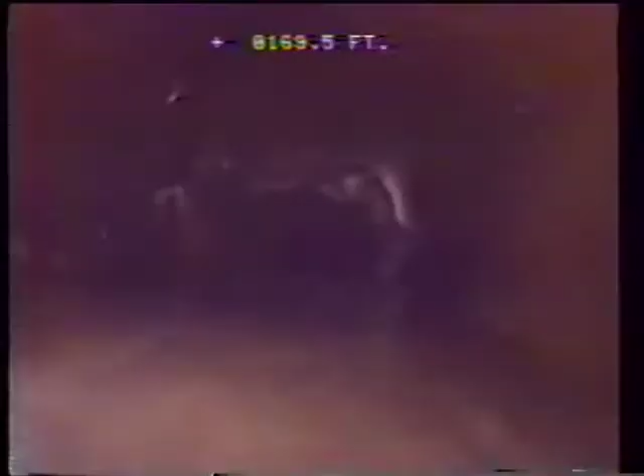Television has been growing in popularity as a means of investigating the condition of all types of buried sewer lines. As an investigative tool, it is unmatched. The advent of television inspection has enabled operators to pinpoint structural damage, corrosion, leaking joints, root penetration, illegal connections, and other problems often seen in older lines.

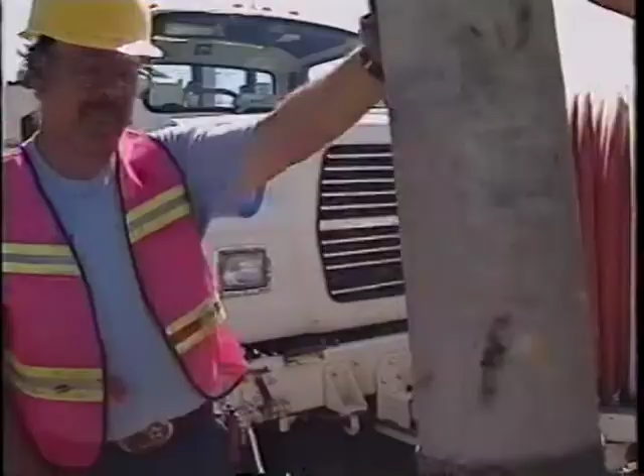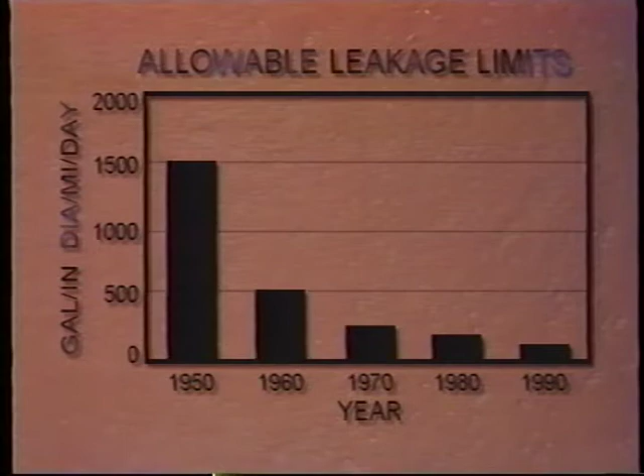Maintenance and rehabilitation of older systems has been made possible through the use of televised inspection. And as the older lines are brought up to today's standards, much of the credit is due to underground television surveys and to the fine work of the crews that do the evaluation.

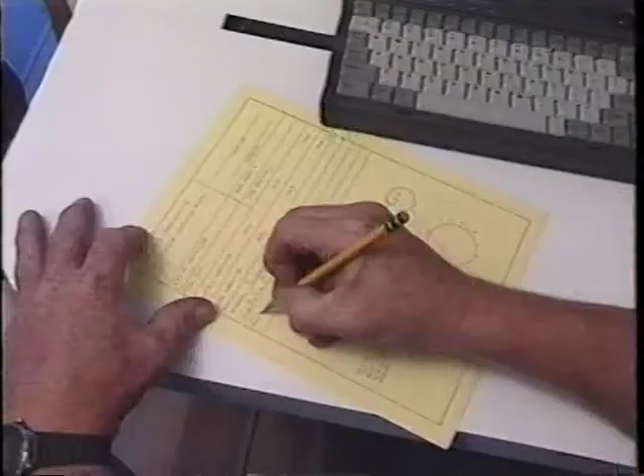More recently, however, a number of agencies are using television as a means of determining the acceptability of newly constructed lines. Opinions regarding structural damage are, in many instances, made erroneously. Operators of television equipment are looking for problems. This is the nature of their job.

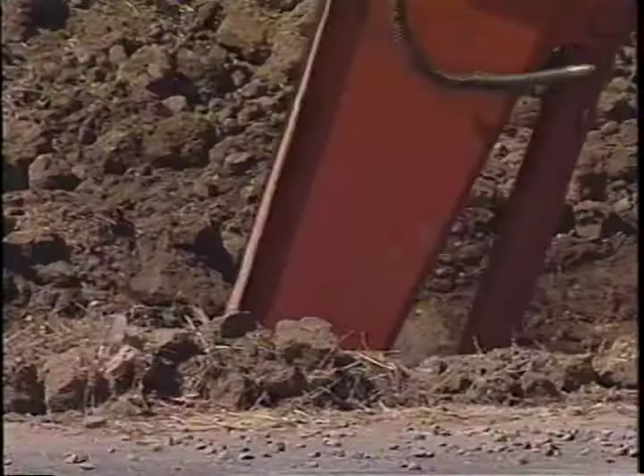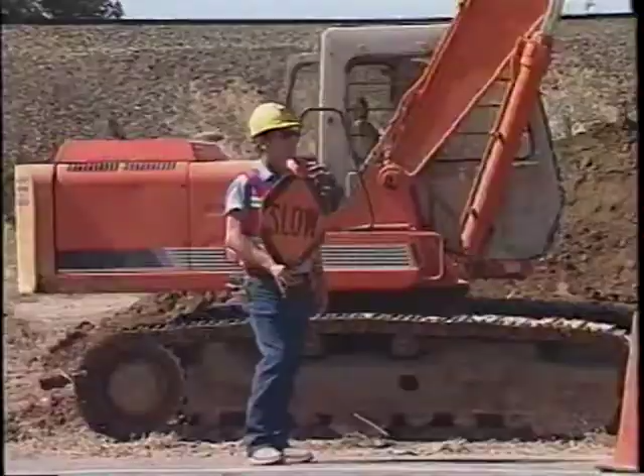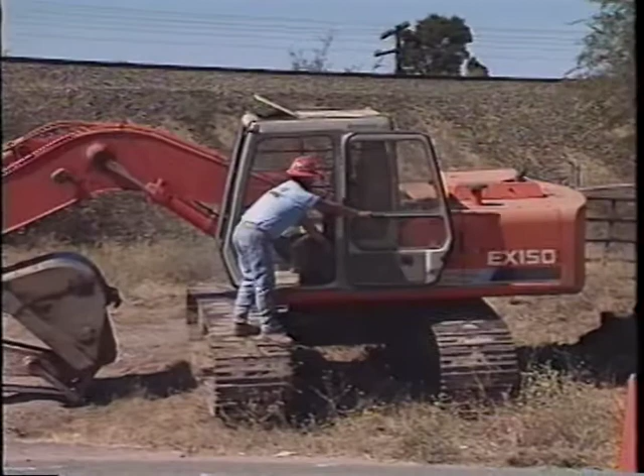However, there have been many instances where dig-ups have shown the problem described in the log to be either non-existent or of a significantly less magnitude than originally indicated. Unfortunately, when entered into the operator's log, these unintentional errors of judgment have frequently led to conclusions which become difficult to resolve. This practice has resulted in delay, extra cost, confusion, and in some cases, legal action.

To prevent unnecessary expense, delay, and possible litigation, the National Clay Pipe Institute and the National Association of Sewer Service Companies agreed to co-sponsor a project to explore these problems in greater detail. Recognizing the educational benefit that would come from the study, the CUES Corporation also agreed to participate. The evaluation would be done at the clay pipe manufacturing facility of Gladding McBean, located in Lincoln, California.

The goal of the project is to demonstrate and identify several factory and field conditions which can be erroneously interpreted during televised video inspection and assessment of new sewer lines. It is by no means all-inclusive, as many other conditions may be found in a sewer. The following three areas will be covered. 1. Sags in line. 2. Seeing is believing. Or is it? 3. Perceived defects.

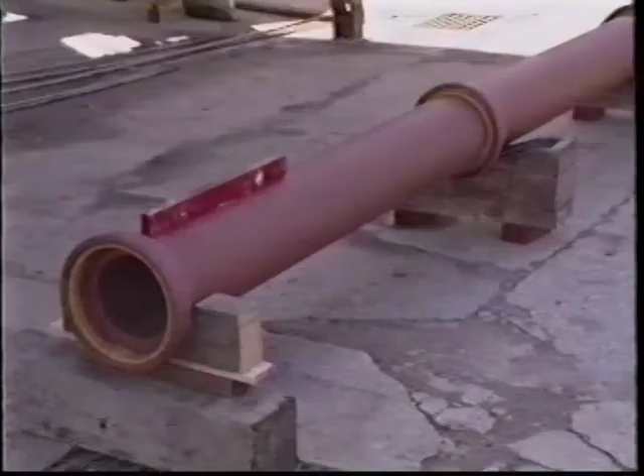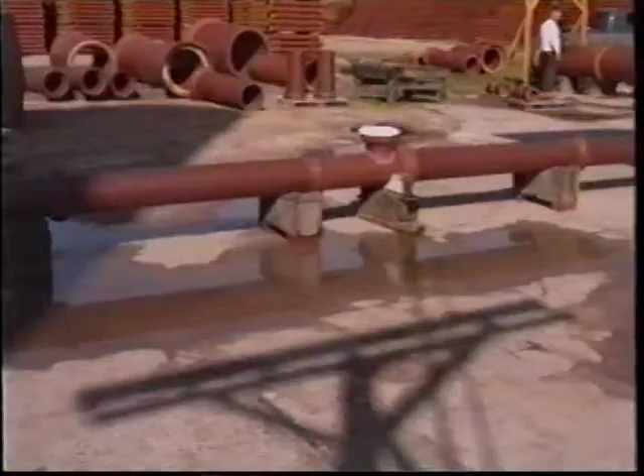Sags in line. The first test shows a simulated sag in an 8-inch clay pipeline. Although the amount of sag permitted in a pipeline is not specified in ASTM, it is common knowledge that all pipelines experience some settlement under load, and it is due to the pipe bedding rather than the pipe itself.

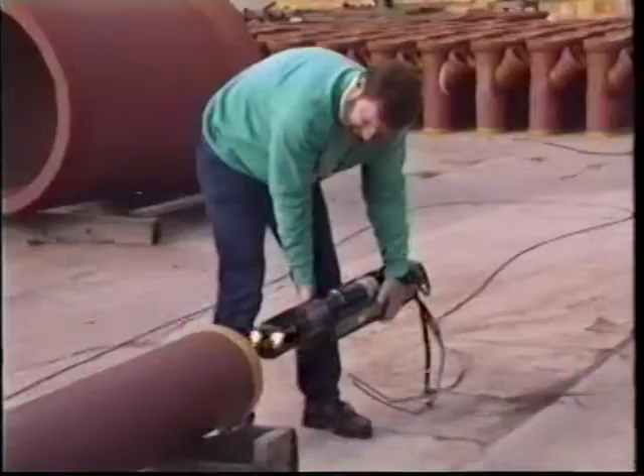It should also be noted that a televised inspection made shortly after a water exfiltration test can have the appearance of a sag due to the standing water, which may take a long time to drain from the line. This is especially true in a line with a very flat grade. Such lines have been erroneously declared to be sagging by an inexperienced operator.

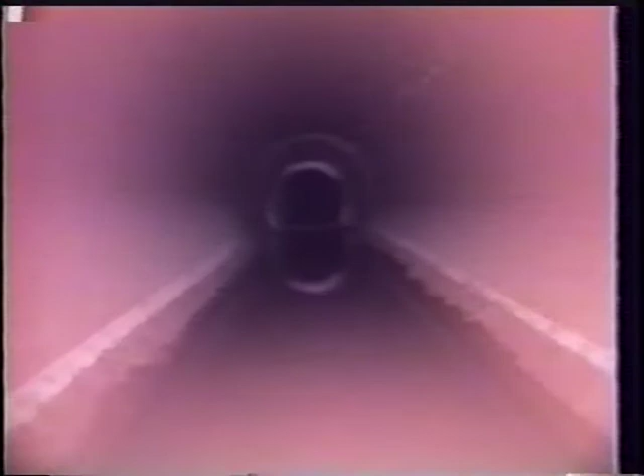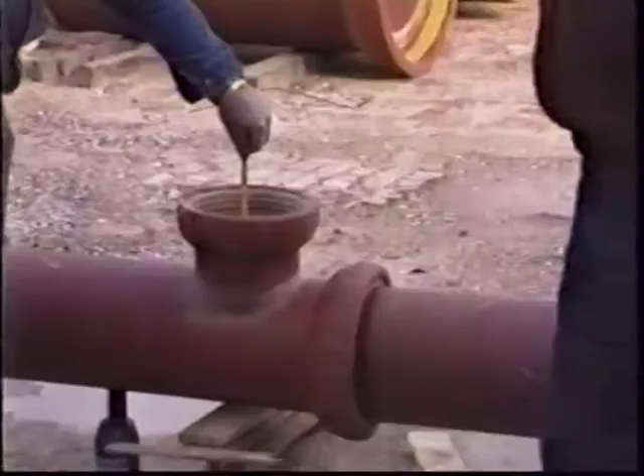Estimating the depth of water is very difficult. Can you estimate the depth of water in this pipe? Visually, there is no point of dimensional reference other than the pipe itself. Our measurement indicates the water depth to be 1 1/2 inches.

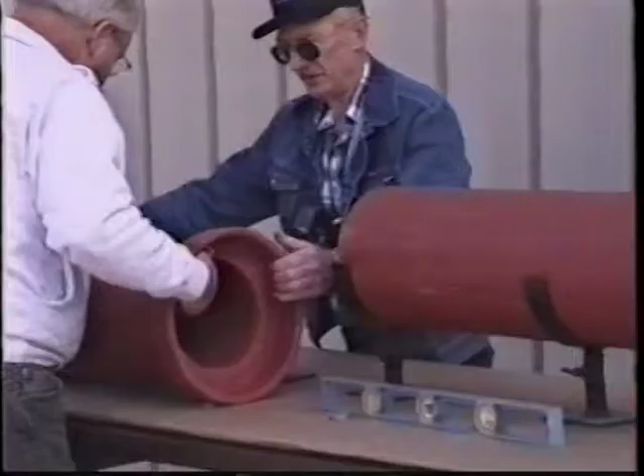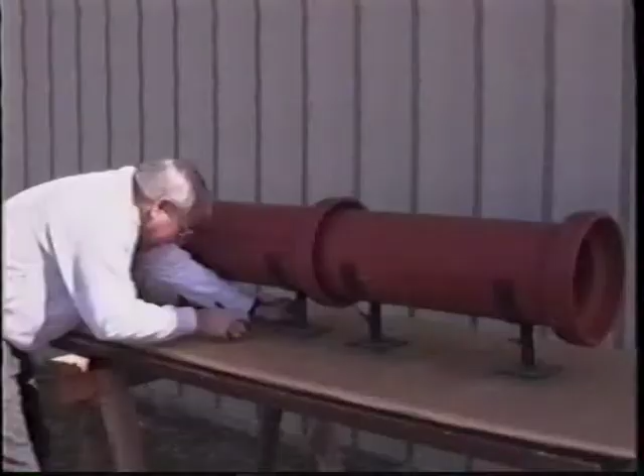Seeing is believing, or is it? The next part of the evaluation was done in 2 short lengths of 8-inch vitrified clay pipe. The shorter lengths were selected for ease of setup and adjustment. The pipe were without gaskets of any kind to enable maximum joint movement.

A frequently observed field observation is sometimes referred to as a halo. It was believed to be caused by the camera light reflecting off the pipe, especially at the joint. This reflected light tends to exaggerate and distort the resulting image. Let's listen to an operator's comments.

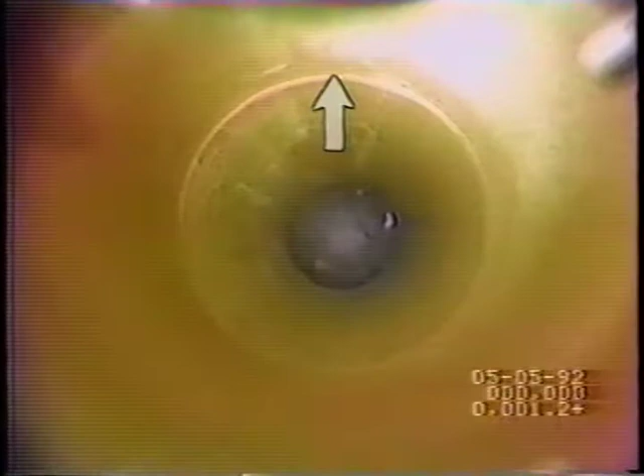What you're now viewing is a 1/4 inch. The upstream section of pipe has been raised a 1/4 of an inch higher than the downstream section. As we turn the iris up, you can see the top of the pipe. The offset that you would see would be in quadrant 3, which is the top of the pipe. You would not see anything on the bottom when the upstream section is raised.

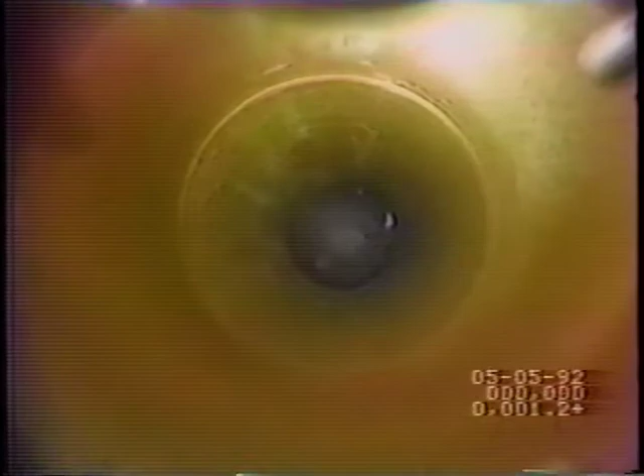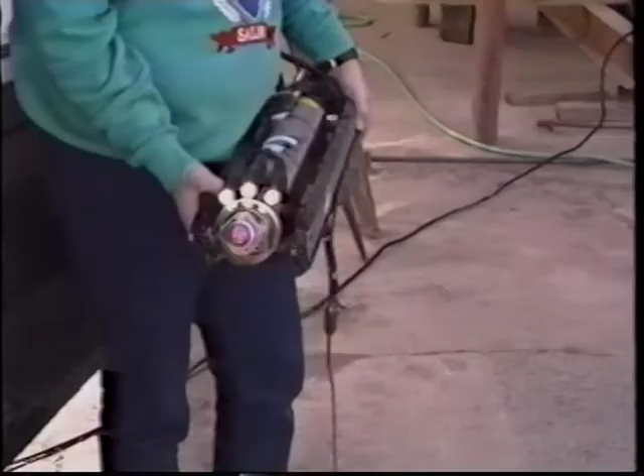The camera used by Hughes at the Lincoln tests was a current model, which had automatic light and lens adjustment capability. This time, when the operator attempted to increase the light intensity, the camera lens simply compensated for every light adjustment. Unable to reproduce an often observed field condition, the Hughes engineer was asked to disarm the automatic light compensating feature and go to a fixed light system. When these modifications were made, the condition observed in the field was immediately duplicated in the test setup.

Using both the auto and fixed light arrangement, a series of tests were made in several conditions. Straight alignment. This is the joint in straight alignment. With the camera set at a slight angle relative to the center line of the pipe, notice the appearance of the left side of the pipe. This is due to the slight taper, which is a result of factory trimming before the pipe is fired.

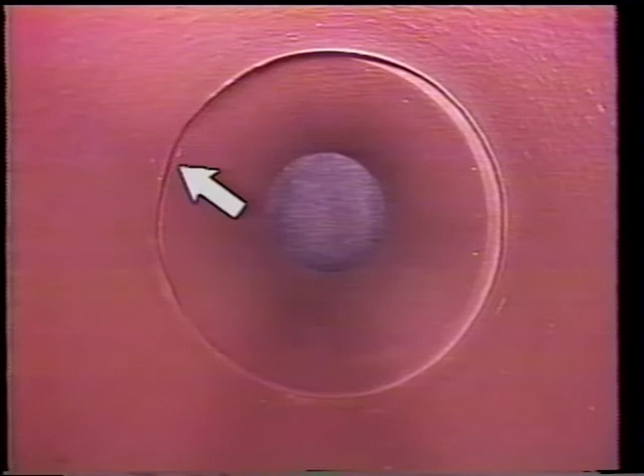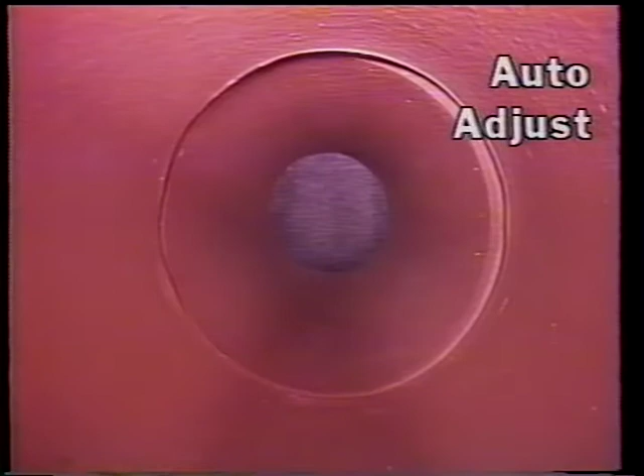The other side also has a taper, and although it is only slightly smaller, it is not accentuated by the camera. Here is the same pipe with normal light and the joint taken apart. Notice as the light changes, the taper becomes less visible. With the camera placed back in the pipe, notice the difference between the auto-adjust light and the fixed light.

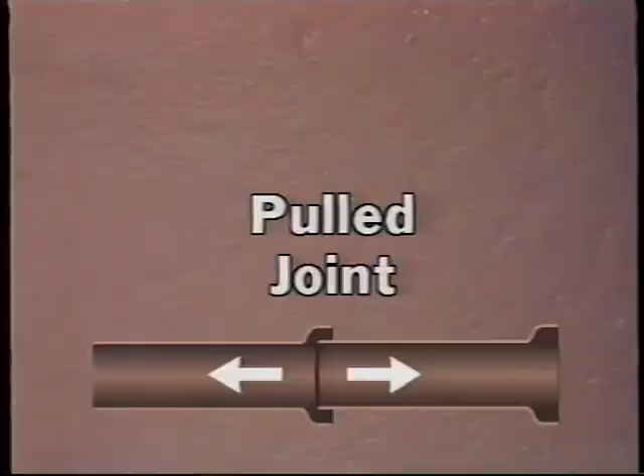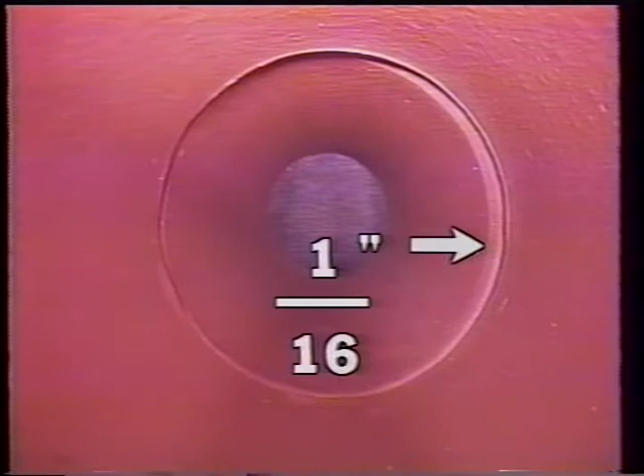Pulled joint. The next tests were of a pulled joint, which is sometimes called a gap between the ends of the pipe in straight alignment. Gaps of 1/16, 1/8, 1/4, and 3/8 of an inch were simulated between the pipe ends to create the gap. Notice that the full circumference is visible, which is an indication of a pulled joint.

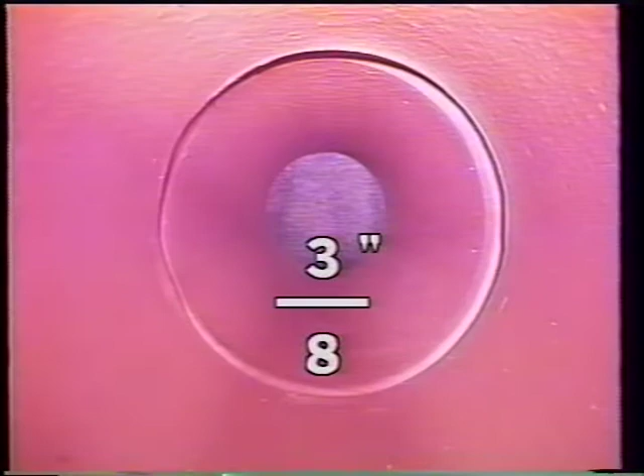With the gap set at 3/8 of an inch, notice the change in appearance when the intensity of the light is increased. Keep in mind that the pipe is still in straight alignment and there is no offset. The clue to determining whether it is a gap or an offset can be found by looking at the joint. A gap should appear uniform around the pipe, but an offset will be crescent-shaped. The position of the lights can change the appearance, making interpretation difficult at times.

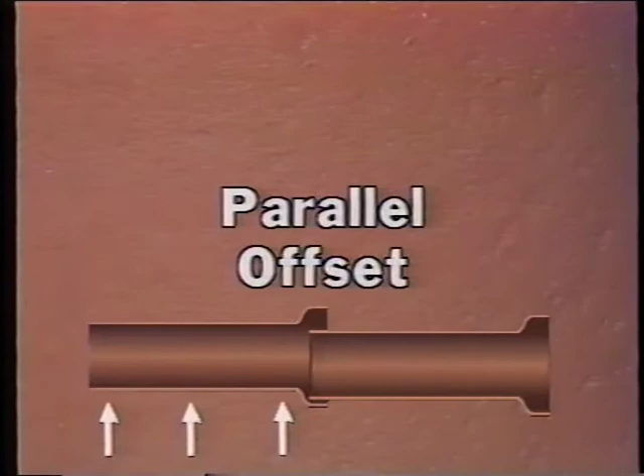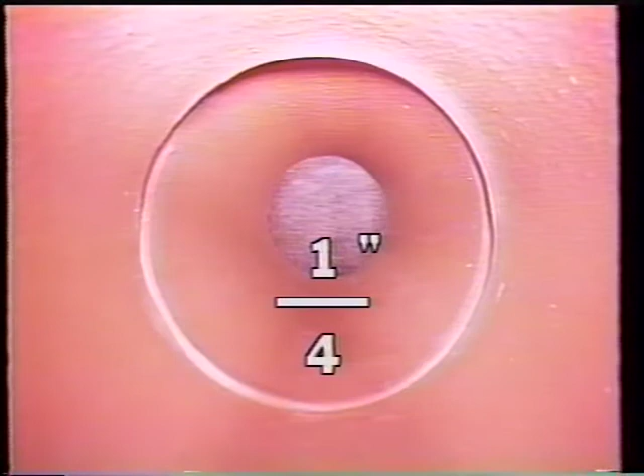Parallel offset. The next series is a parallel offset joint. By the use of pipe supports and shims of varying thicknesses, offsets of 1/16, 1/8, and 1/4 of an inch could be simulated. When one pipe is displaced in a parallel manner in the amount of 1/4 of an inch, the joint looks like this. Notice the distortion when the light intensity is increased. Doesn't this offset look more than 1/4 of an inch?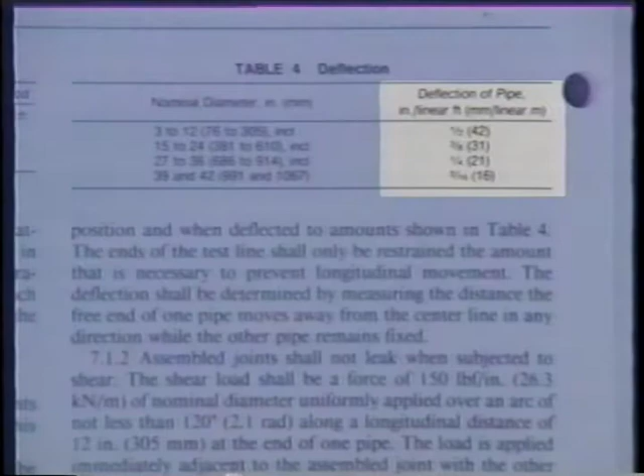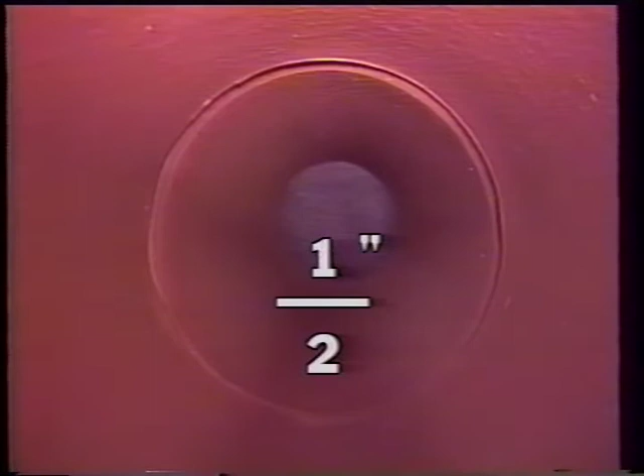Angular deflection. The next series is angular deflection. ASTM standards require clay pipe joints to seal in angular deflection up to a minimum of 1/2 inch per foot of length, depending on the pipe diameter. Although harmless in the normal operation of the sewer, the edge of the pipe can appear as a gap, and it could be noted as such by the operator.

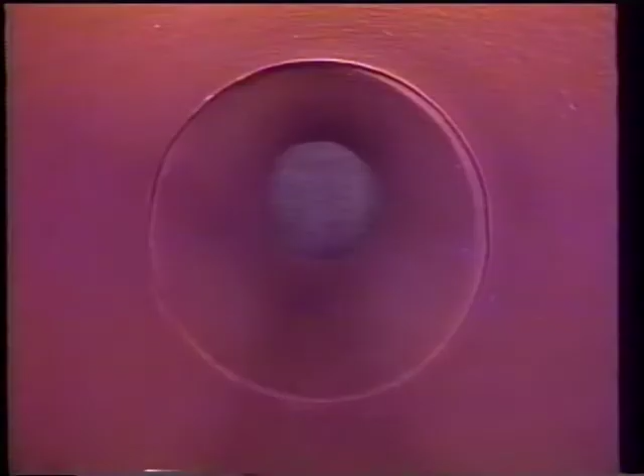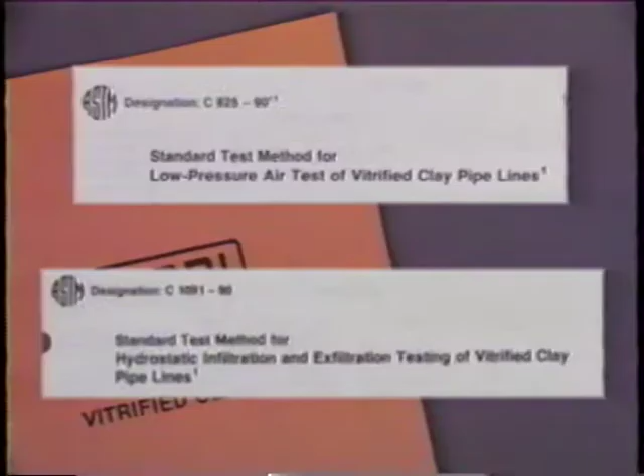Although there may be a gap on one side due to the angular deflection of the pipe, the other side of the pipe is completely tight, as demonstrated by rotating the pan and tilt camera around both sides of the joint. The following view with normal and high light intensity is well within the sealing range of factory-applied joints and the allowable limits of the ASTM standards. In fact, there is nothing improper about this condition, and if the line otherwise meets a pressurized air or water test, it is completely acceptable.

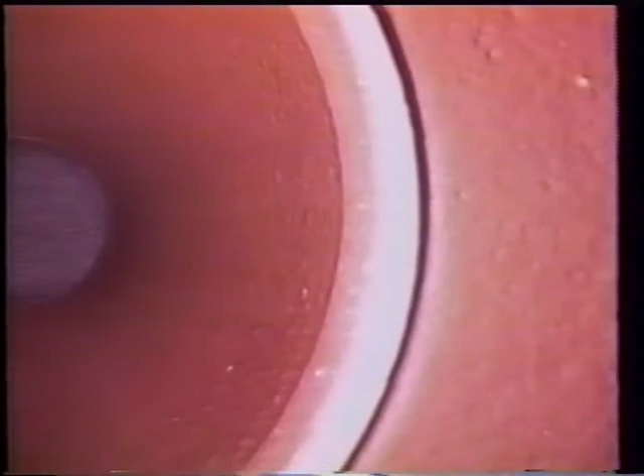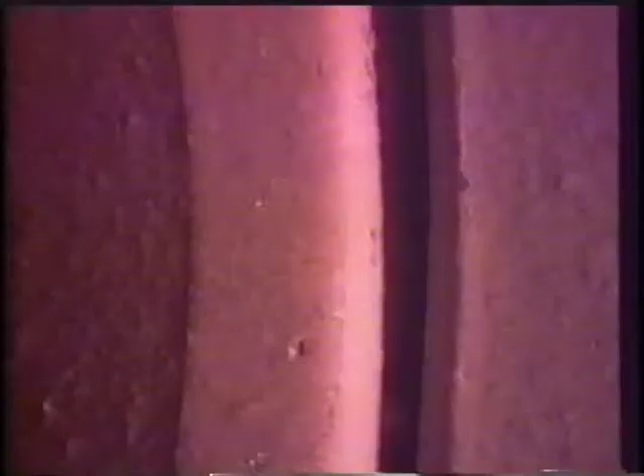Perceived defects. With the camera still looking at the joint in angular deflection, we will increase the light intensity. Notice that the two areas merge together to give the appearance of the end of the pipe. As the camera moves in for a closer view, it becomes obvious that there is a tapered surface on the inside of the barrel that is reflecting light and contributing to the visual distortion. To understand this condition, it is necessary to look at the manufacture of clay pipe in some detail.

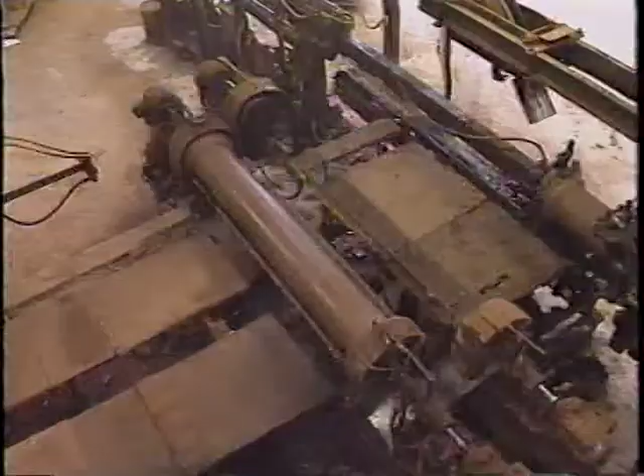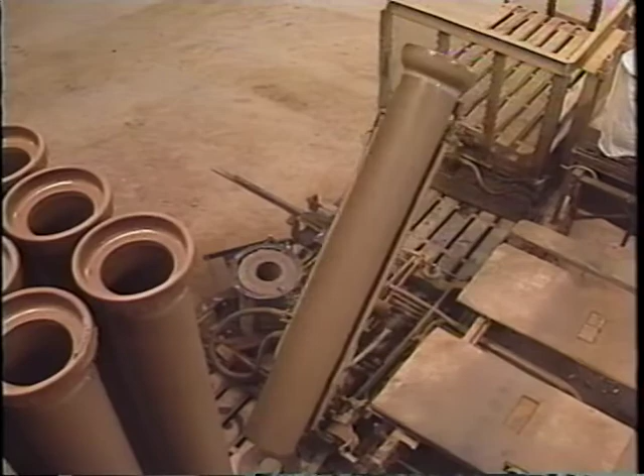Following extrusion, the ends of the pipe are cut to length and trimmed to remove excess material. End finishing is done with sharp rotating knives that produce a very slight taper on the inside edges of the barrel at each end of the pipe. These tapered areas are almost invisible to the naked eye, but when the light is reflected off the surface and the camera is in the right position, the taper can appear to be a gap or an offset joint.

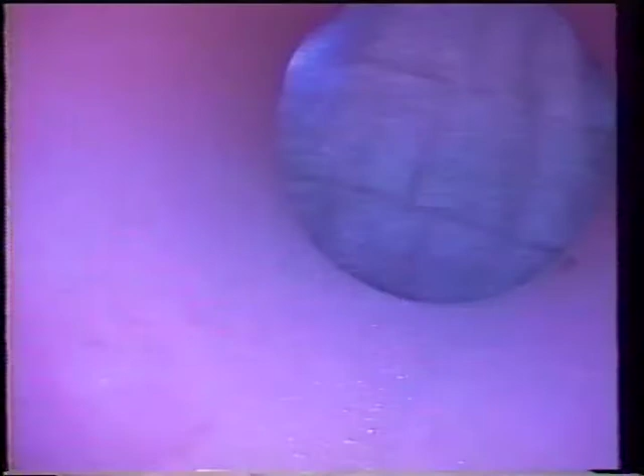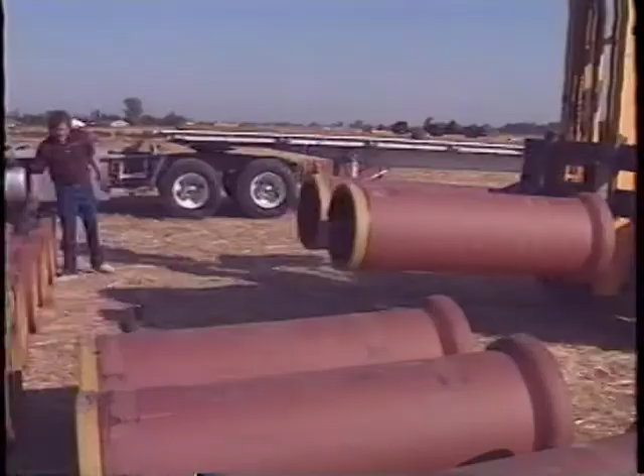There are other conditions which can be misinterpreted. Manufacturing marks, surface scrapes, and forklift marks can give the appearance of cracks or fractures to the untrained inspector and can lead to erroneous and costly interpretations.

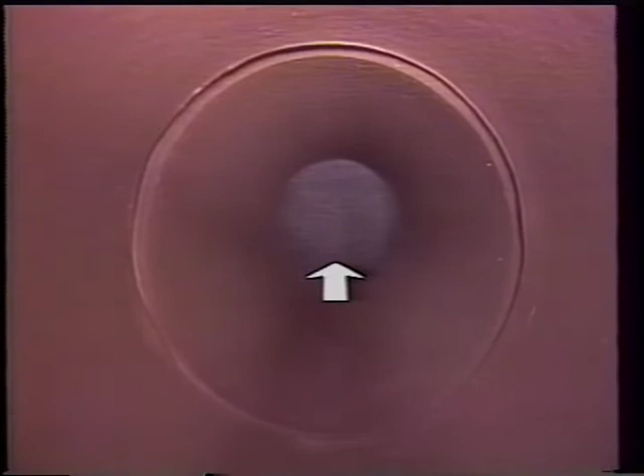Summary. 1. The image as seen by the eye of the camera can be distorted. The appearance of an offset joint is exaggerated by any gap between pipe ends and the angle of the joint itself. 2. The camera angle increases the distortion. A camera that is not centered in the pipe will allow the camera eye to look into a joint rather than along the interior pipe surface. This distorts the operator's perspective and consequently the interpretation.

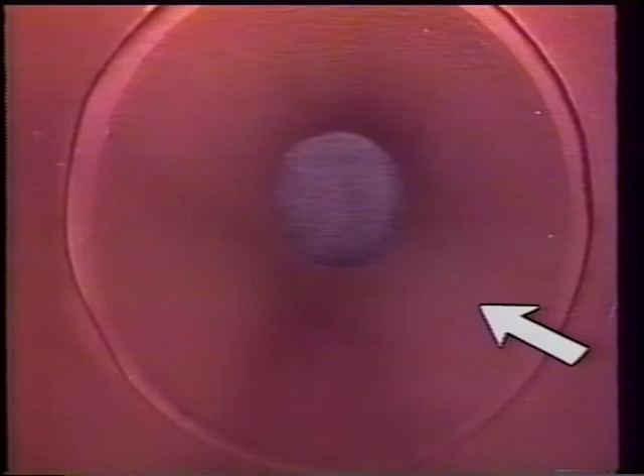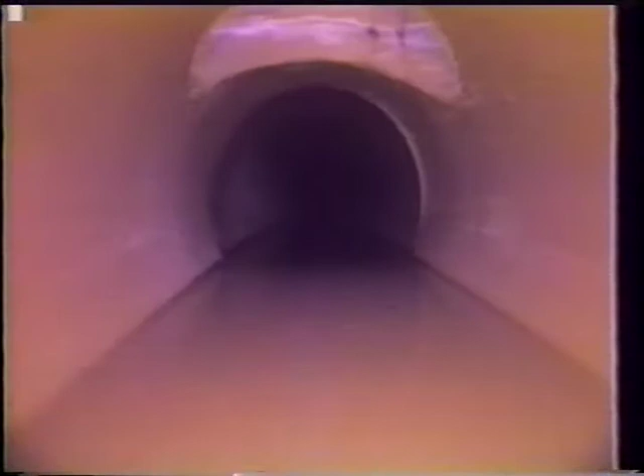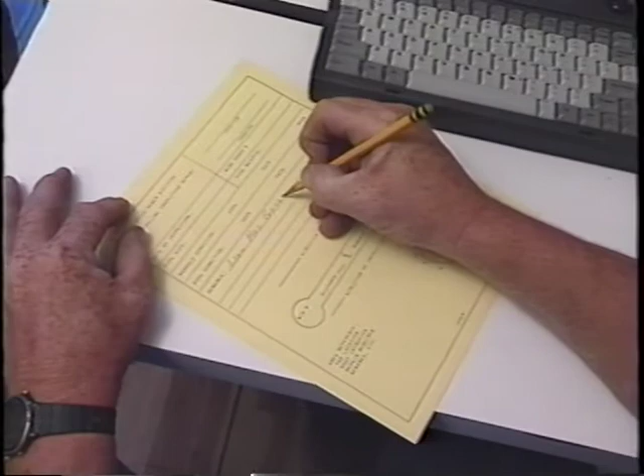3. The specific dimension of an offset, a joint gap, or the depth of water is limited in accuracy. 4. The operator's log is frequently interpreted as being much more accurate than the operator intended. 5. Manufacturing and handling marks can appear to be serious defects. The brightness of the light will influence and distort the visual image.

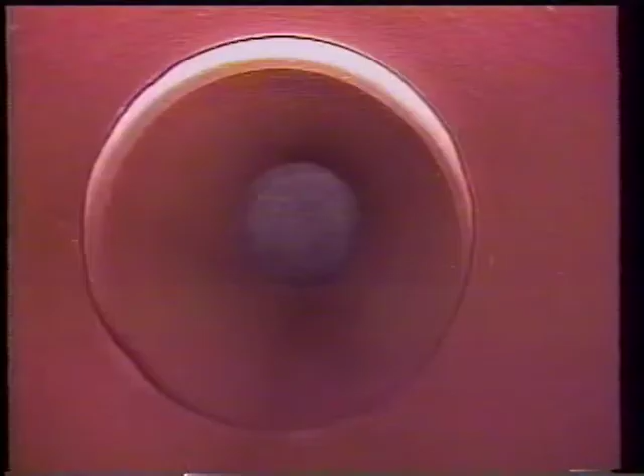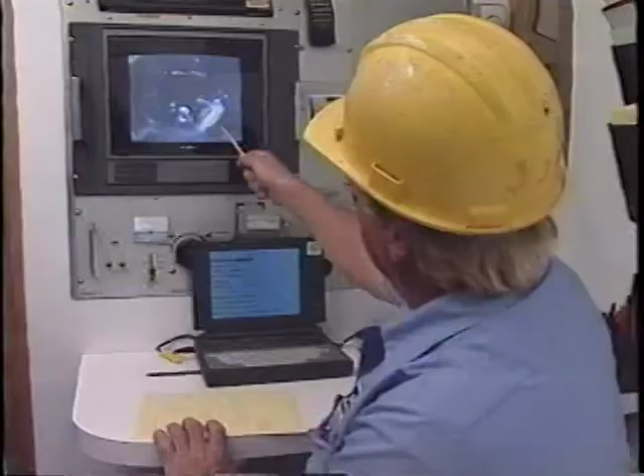As we once again look at the exaggerated reflection off the tapered edge of this pipe, we are reminded that as an acceptance test, the interpretation of television inspection has not reached the level of reliability or accuracy demonstrated by established ASTM acceptance tests. Television inspection is a good tool. Let's not ruin its effectiveness by exceeding its capabilities. Simply stated, you've got to know your limitations.